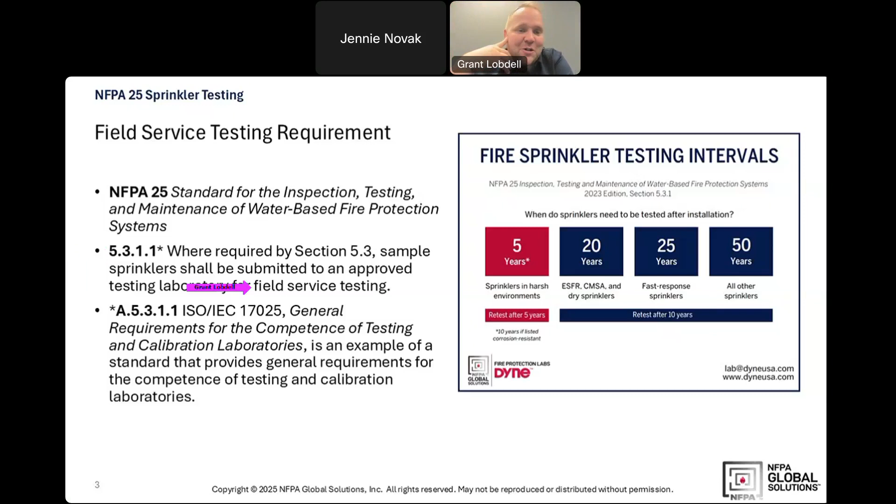And the last part of that is you're going to send it in for the field service test, which is what we're talking about today. Many of you may call it the UL test, for many years they were the only ones doing it, but technically it is just the field service test, the NFPA 25 test. That's what we're talking about today. So now that we understand we have to either replace or test samples periodically, let's say you've chosen, okay, I am going to test.

I'm not going to replace every sprinkler in the building at year 50 or year 25, whenever it's due. I'm going to sample and get some tested. I always like to bring up, before sampling there's a step that needs to be done by the contractor in the field, whether that be the building owner themselves or their designated representative, whoever's qualified to do this work.

Sprinklers should first be given an inspection. That floor level inspection is addressed in section 5.2.1.1.1 of NFPA 25. So you're going to look through, from a floor level, all your sprinklers for anything that shows leakage, corrosion detrimental to sprinkler performance, physical damage, loss of fluid in the glass bulb, loading detrimental to performance, or paint other than that applied by the sprinkler manufacturer detrimental to sprinkler performance.

So there's a lot there. Let's just break that down a little bit here, and I've shown some samples on screen. Any sprinkler that shows these signs, we're just going to replace right then. We're not going to take those samples and send to a lab unless they truly are representative of all the sprinklers in the area, and you've got an owner that's not willing to replace until we test.

But ideally, you may have one that's in a weird area where there's some fumes or some extra moisture, maybe it's got some leakage. What's shown on screen, I hope those of you that can see the PowerPoint can see this. If not, again, these will be shared after. We have many pictures here of sprinklers throughout, and we also have online pictures that we can share as well.

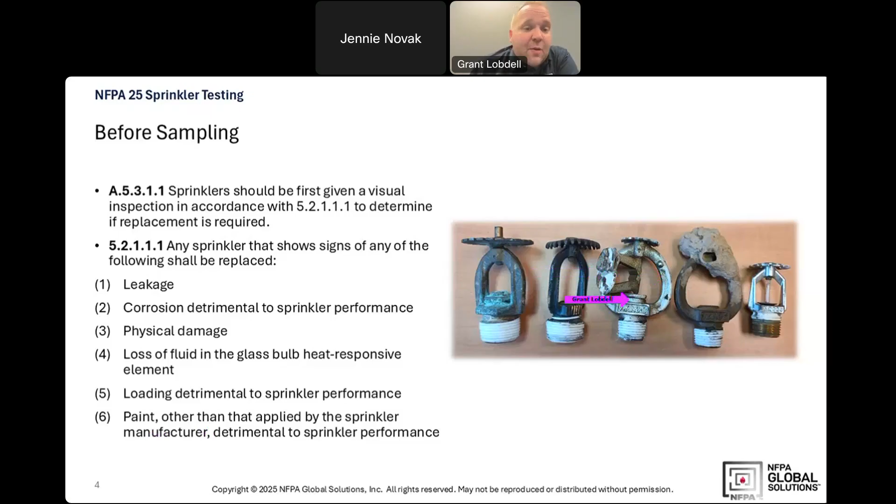So we're really looking at paint on the release mechanism. In this case on screen, I'm pointing to a fusible link that has paint holding it together. On the release mechanism, we could have paint around the water seal. Maybe the fusible link goes off, but the water seal remains in place, because the paint could be holding it on.

You could also be talking about paint in the teeth of the deflector, where it's going to affect the water distribution pattern. So that's just a quick rundown of what you're going to look for before sampling for the laboratory. You're going to go through, as you do every year, an annual floor level inspection, look for these signs, and replace any sprinkler that has them. Then anything that remains is what we're going to sample from. That's before sampling.

Now let's actually talk about sampling. We've gone through, we've decided, we understand it's a requirement. Let's say on screen here I'm showing some standard response sprinklers. They're not in a harsh environment, so these I need to test after 50 years. I've talked to the building owner, and he decided he doesn't want to replace everything, that it's really costly. He's going to test, test a few of them.

Now we're going to have to do some sampling. We're not going to test every sprinkler. This is a destructive test. When you send it to the laboratory, it goes through an oven and does get destroyed. The sprinkler releases, the glass breaks, the link falls apart. You're not getting these samples back. So you just take a sample down, and we give you analysis, and then we say, okay, if that represents what you have, here's what could be going on.

So how big of a sample are we talking about? NFPA does have a requirement for that.

They say that a representative sample shall consist of either a minimum of 4 sprinklers or 1% of the sprinklers in the area, whichever is greater. Let's break this sentence down. If you have 400, 1% of that is 4. So 400 or less, you're going to send in 4. Once you start getting above 400, if you have 500, you've got to send in a minimum of 5. If you've got 600, it's 6. Pretty simple, that's what you're required to sample.

Let's hope this works and shows up for people. No more buckets and tarps. No more water or smell. No more hassle. The DropMaster DM12 makes replacing sprinklers easy. After draining your sprinkler system, simply connect the DM12 to your drain and wait for the system to get to vacuum before proceeding with your removal of sprinklers. The air pulled through the sprinkler system by the DM12 and the vacuum it creates will carry trapped water with it. The pump inside the DM12 will then discharge the collected water where you want it. When done for the day, drain any remaining water in the drum. Drain any oil collected from the muffler. Top off the oil in the vacuum head reservoir and clean the Y strainer basket on the suction line. This will ensure your DM12 remains in good working order and is ready to go for the next job. And built to last right here in the United States. The DropMaster DM12 will quickly become one of your favorite tools. Order yours today. Contact Dyne Fire Protection Labs for current pricing information and lead times. Parts and repair services are also available.

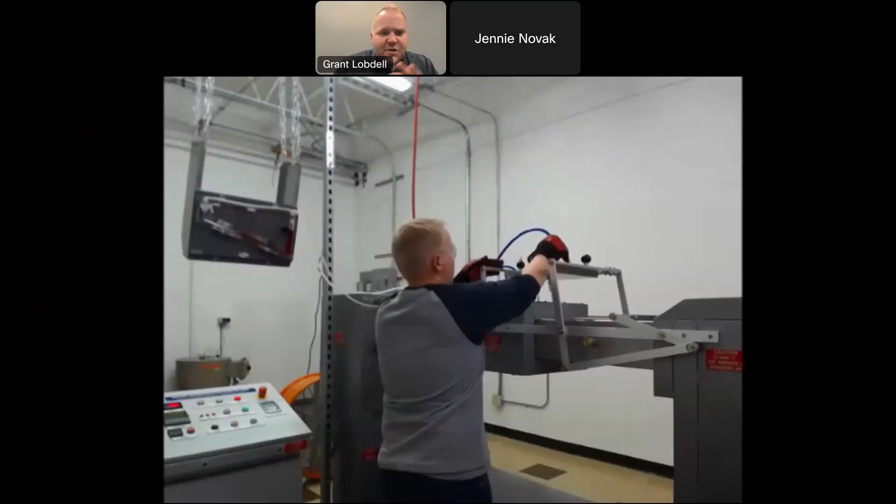And let me go back. I actually had a video. It's an old one, but it's a good one. It's got a little bit younger, a little bit thinner me in it. And this video is just very roughly, this is when we were R&Ding one of the ovens many, many years ago. It just gives you a little bit, again, we showed a picture of the oven, but just kind of

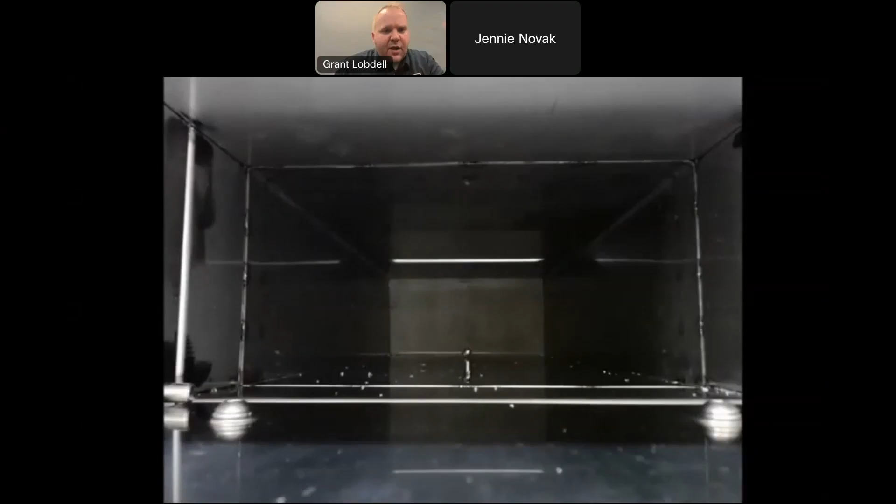the process. You see me there, I connected it to about 7 PSI of pressure, plunge it in the oven. On the oven itself, there's a little timer in the background. When you plunge it, it goes, okay, here's the time started. Then we have a little bit of a time lapse happening here, but the sprinkler's in the oven. This is kind of looking down the tunnel of the oven, and off it goes, right?

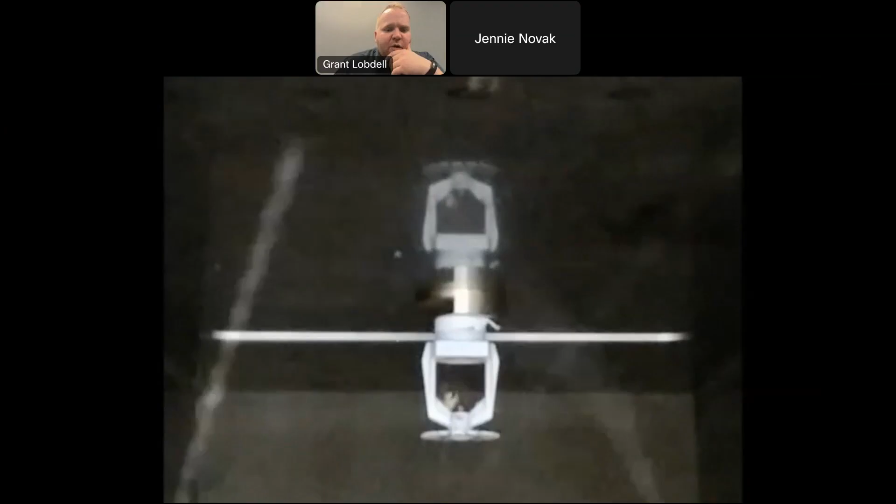And then when it releases, that pressure releases, it can detect that, and that's how we get our time. So that's really what we're doing when you're sending a sprinkler. You're using the specialized oven to monitor how long it takes to go off. Let me go back to my slide here, and we were going to talk about failures now.

So I get asked that question often because you may have to decide, am I going to replace or test? And an owner's thinking, well, if it's always going to fail, I'm better off just replacing. They don't always fail, right? About 5% of the time they do. And with any data, right, there's always some considerations to make.

Maybe it's in some sort of pool area, built up some nasty crud around it, or it's leaking. And the building owner says, no, you're telling me to replace it, I want you to give me some data on that. We gave them the data on it. So just keep that in mind when we're talking about failures. We are getting some sprinklers that clearly should have been replaced at the annual floor level inspection. And I break that down for you here, just if you're curious.

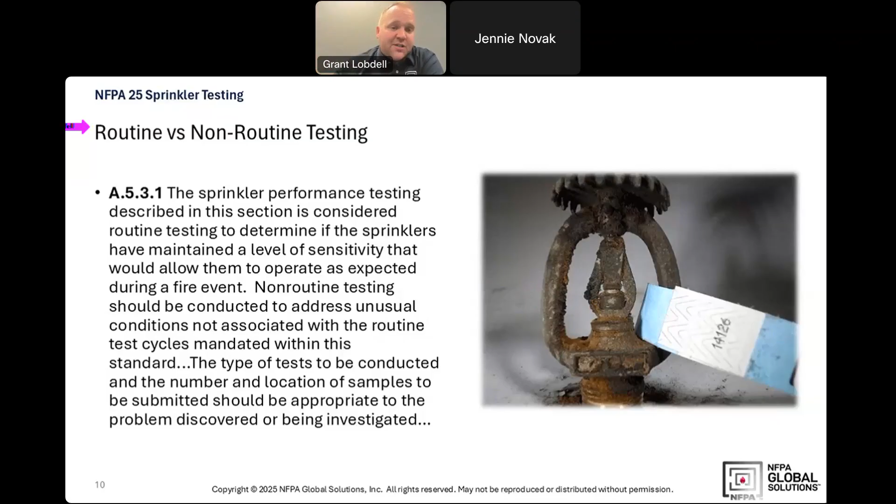And you're not beholden to all these other requirements that I just went through here. Those are just for the routine, the 5, 20, 25, 50, as it currently says in 23. So I appreciate it, I went a little long-winded.

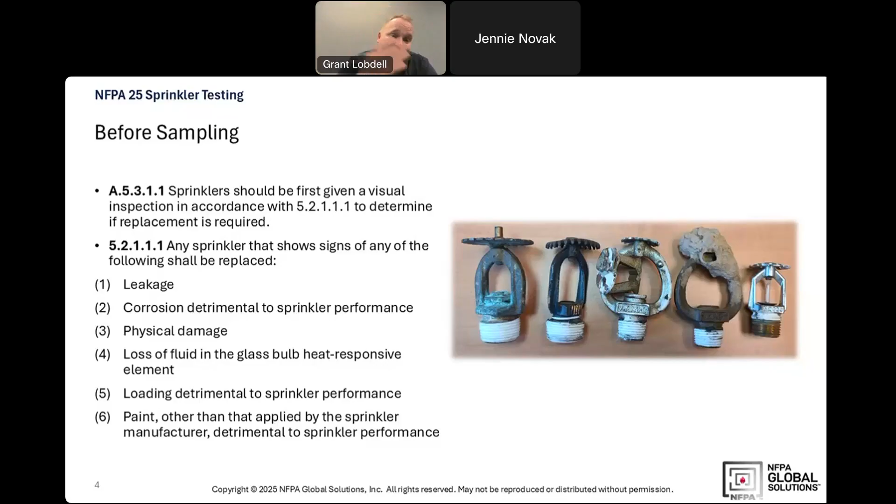But it's a great question, a tough question. I knew that would come up, or harsh in general — that's why I bring up some examples. It depends on the sprinkler you have, what kind of environment you're in, what it's made of. Is it stainless steel? Then it could be one of your listed corrosion-resistant types where you can go a bit longer. Is it wax coated, in a swimming pool? That buys you a little bit of extra time — the wax insulates the moisture from the sprinkler. But in general, outside, in some cases yes, but I specifically wanted to call out dry sprinklers and cold because, in my opinion, it's designed for the cold. So the cold by itself should not be called harsh in that instance.

The cold by itself, with a regular sprinkler, isn't going to affect performance. It's the moisture, or lack of it, fumes, chemical fumes — that's what we're really looking for with corrosion. A harsh environment could be loading too. I've seen a lot — I don't know if they're from some sort of metal shop where they're dealing with molten metal and things — that oil just gets built up around these things, and that would be considered harsh too. So not just corrosion, but loading.

If a head arrives with the element knocked out of it, is it noted that it couldn't be tested, or is it marked as a fail? Just noted — we'll delete it, we won't charge you for it. Now, if it's one out of a group — if you keep sending a bunch and we're paying the shipping, if you're using a free kit, there may be some sort of charge for that. If we're paying all the shipping and you keep sending broken sprinklers... but no, in not every case. Usually it's like, look, they sent us one broken in transit — no, sorry, we can't test it.

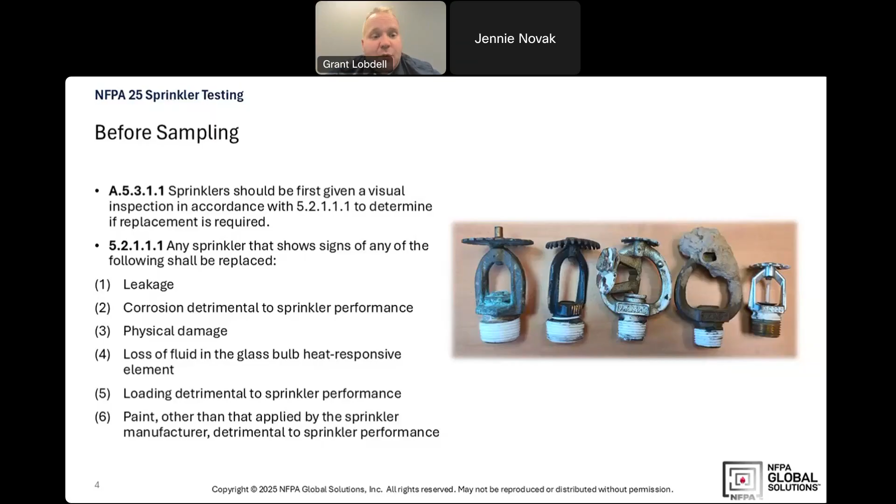If a head activates before the RTI number, is that a fail? No, it's the other way around. RTI is a maximum - I should have covered that a bit better. Let me go to that slide. This says the sensitivity does not exceed 350 for standard, 65 for quick, and 50 for ESFR. So that's a maximum. We want quick response times.

We want them to go off pretty quickly. We're plunging them in the oven well above the activation temp. There's really 4 different temperature ranges we use. We don't want to take every sprinkler and put it in at 800 Fahrenheit, because the ones rated for 155 are all going to go off really quickly - we're not going to see any differences. So we have 4 different ranges, but the ones rated for 500 Fahrenheit, they're rare, but we do occasionally see them. Those ones we have to put in at 600, 700, 800, so they go off in a reasonable amount of time for us.

So it's the sweet spot where we want to see differences. We also don't want to wait hours, where it's not economical and costs so much that it's more likely not to be done. But that's the maximum - we want to see RTI less than that.

That's a good question too. When it's listed, it's actually sometimes a range - it might have to be X to Y. In this case, it's just a maximum. If it's less than 350, good to go. We do not evaluate premature activation - that's not part of the periodic analysis.

Is it going to activate at 125 instead of 155? Again, we don't measure the temperature at which it goes off - we're plunging it at a static temp. So your 155 is going in at 275. When it's in the oven at 275, we monitor how long it takes to go off. Would it go off at 155 or 125? We don't know from that analysis. We don't currently offer any more than that - that's not required for periodic purposes.

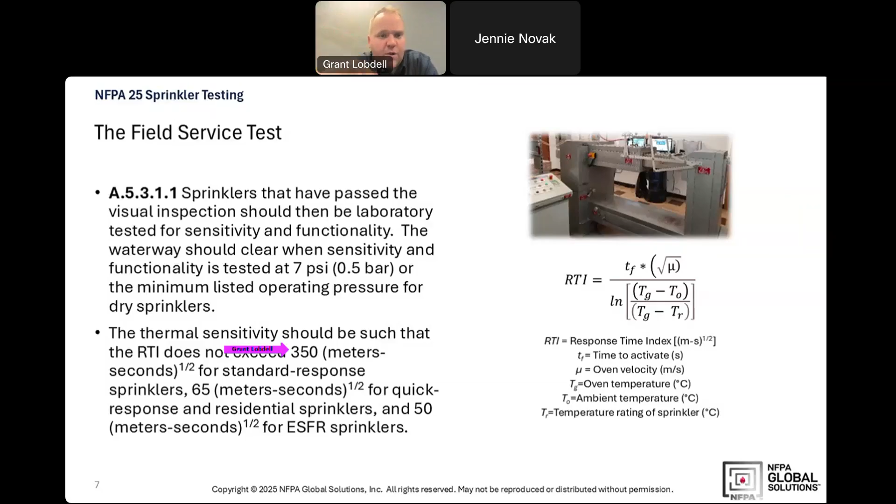Quite a few people on the line. Do you want to keep going with a few more? Yeah, I can keep going. Yeah, we got people here, might as well.

If we send in an O-ring sprinkler, will it automatically fail? Nope, it'll be tested. Nothing in the standard says it has to, and we make it very clear we don't identify or call out any recalled products. I would love to, but I think NFPA or one of the associations might be working on a centralized location for all the recalls. That's our concern as a business for liability reasons—if we call out one recall, we've got to call out them all. We've established we don't offer that service. So no O-rings automatically fail. There's even a disclaimer on the report.

One of these jargons here talks about how we do not identify, remedy, or recall—that's on the building owner. So no, an O-ring won't specifically be failed, it can pass. Again, I had that failure statistic of 50-some percent fail, so there's still half that do pass. You'd get a report, you'd get the time if you're really curious. It's just extremely likely that if you send me 4 O-rings with a 50% failure chance, it's getting unlikely that all 4 are going to pass.

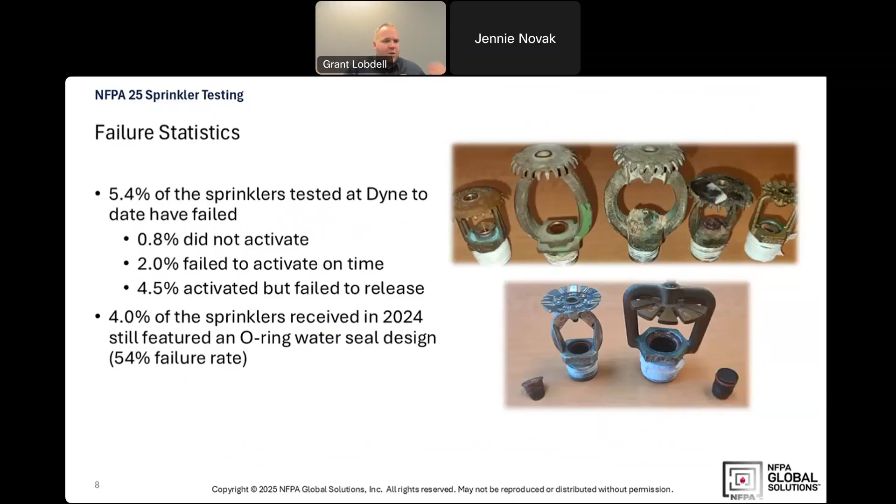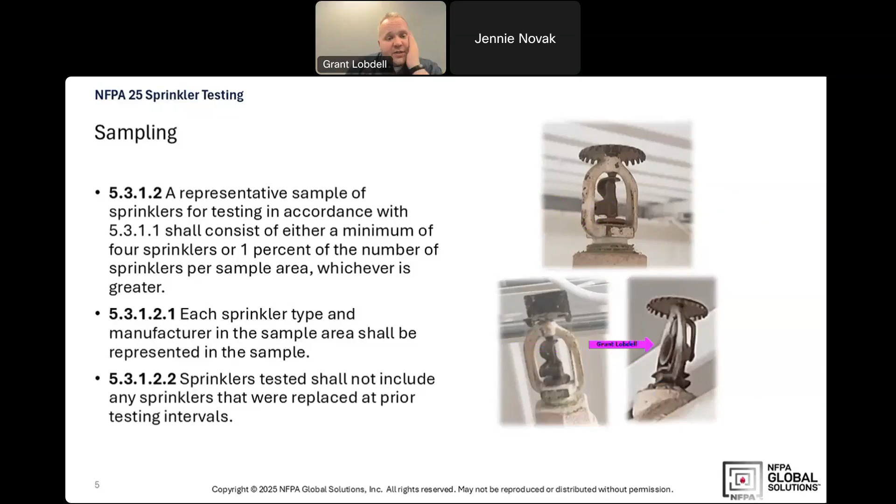Let me go back to my image here. Let's say I sent in 3 sprinklers, and imagine there's another one that looks like them. If this one down here failed, I only have to replace the ones that look like that? That's not currently the way that I interpret the standard. The standard, in the failure language, says that all sprinklers within the area represented by that sample shall be replaced. I interpret that as: your area failed, all that area needs to be replaced. But I can see how you can read it as represented by that sample. If you wanted that, I think you'd have to say like by that type in that sample. Do you know what I mean? It's something you could bring to the committee.

Just so you're aware, as part of NFPA global solution, I'm no longer participating in the committees, I don't have a vote. But anyone in the public can submit a comment. You can go to nfpa.org, go to the standard, in this case NFPA 25, click on the next edition tab. It's not open for comment all the time, there are specific windows. They're on a 3-year cycle, 2017, 2020, 23, next edition's 26. So they're constantly opening that window, getting public input. You could make a suggestion and see what the committee has to say. You can also submit a formal interpretation request on nfpa.org, go to the standard and see what they have to say.

I might do the same. I can ask the committee to respond on, hey, what if just a single type? But the way I currently read it is, if you send me 4, whether any of those fail, I don't care if they're all different types, whatever that represented - it represented my whole building - then I'm replacing my whole building, not just that one specific type.

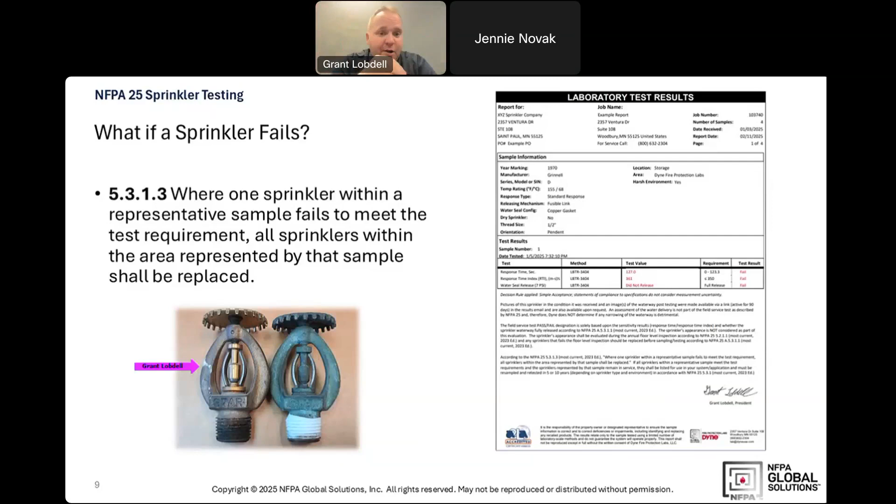Can you clarify the sprinkler hood testing intervals and requirements? Yeah, sprinkler hood testing. I think that comment I made about sprinklers inside of kitchen hoods. I always want to say fume hoods because, again, coming from a laboratory. But there's a requirement in here that talks about, you're just going to replace those. Again, I'm looking at the current edition, but I believe it's been in there for a while.

It's under inspections, I believe. I can always send it out too after the fact, but it specifically calls out sprinklers in kitchen hoods. Just getting on a replacement of every year on those.

There's another question. I can probably try to answer this one while you're looking that up. Yeah. Does Dyne maintain records of locations tested in the past that are accessible to building owners? Well, we do retain the records, and usually our policy is to share those with the company that sent them to us. They're not really public information, if that's the question that's being asked. We usually only report that back to the company that sent us the sprinklers for testing. We'd probably point you back in that direction if you're looking for past testing information.

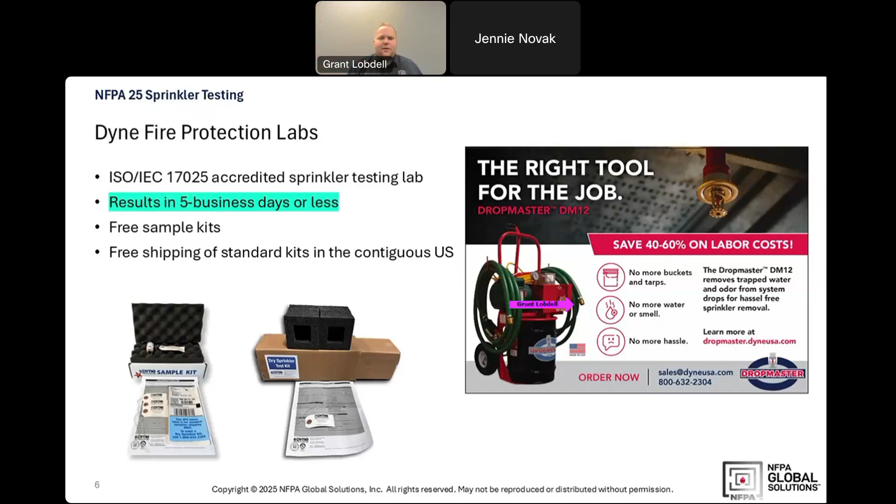There's a couple that we might not have got to. There's quite a few people on there, but I will take a look through those and discuss those with Grant and see if we can get you any answers on those.